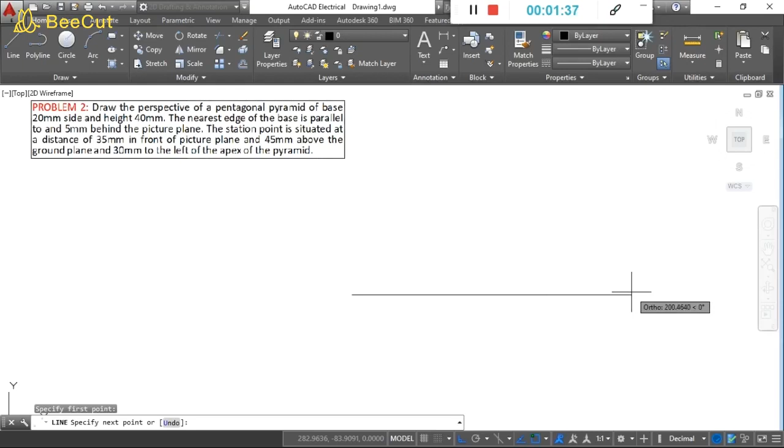You know the first step, first we have to draw a horizontal line. It is known as plan of the picture plane, PPP line. Draw the PPP line. So this line is PPP line.

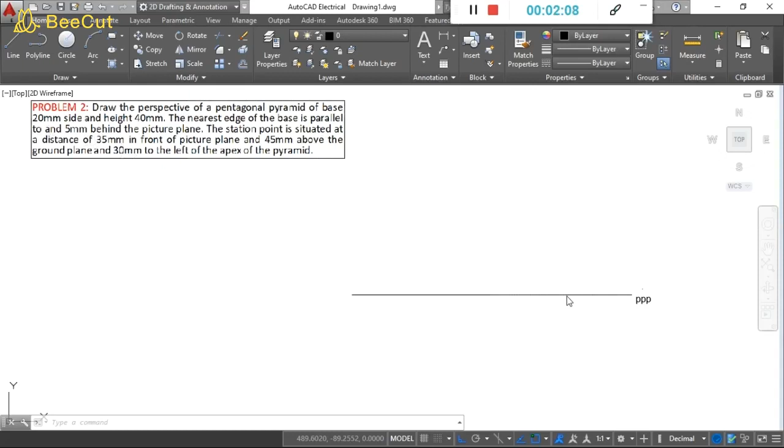Then we are drawing the plan of the object. Object is a pentagonal pyramid, so you have to draw a pentagon. All the diagonals are visible in the top view, and the 20 mm side is 5 mm away from the PPP line. So this is the top view of the pyramid. The 20 mm edge is 5 mm behind the picture plane.

Now you have to name the points. Total 6 points are there. A, B, C, D, E are the corner points on the base, and O is the apex. Now you have to draw the EGP line, that is elevation of the ground plane, on top of this one. You can take a convenient distance, for example 10 mm or 15 mm above this top view. Then draw a line. You can assume any distance.

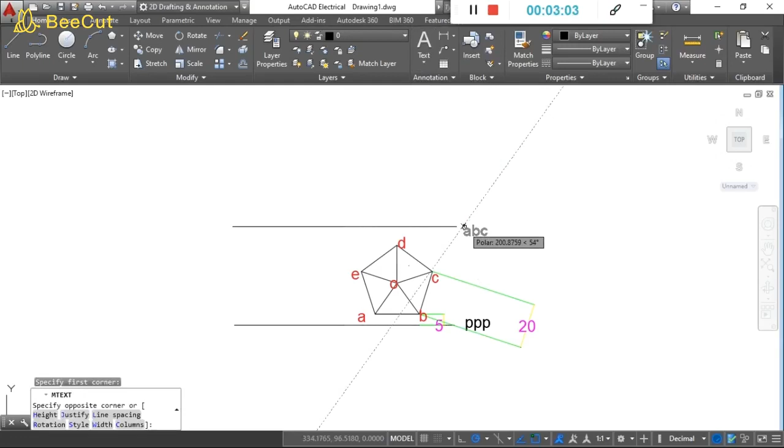So this line is EGP line, elevation of the ground plane. We are drawing this line because on this line we are drawing the front view of the object. Now you got the top view, you have to draw the front view. For that you have to draw projection lines from this one.

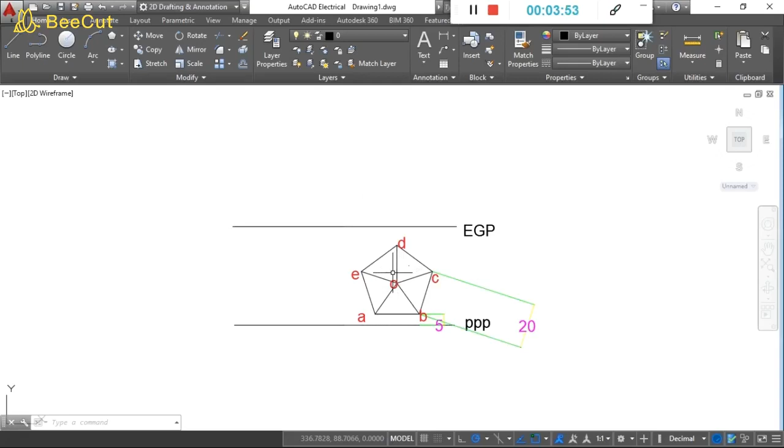See, the procedure is exactly same as that of your orthographic projection. First we are drawing a line, that is known as plan of picture plane, and then you are drawing the top view. Then you are drawing XY line. Here it is known as EGP line, and on top of that line you are drawing the front view. So all the procedures will be exactly same as that of orthographic projection. So we drew the projection lines.

Then after this you can draw the axis height. Take the axis height. What is the length of axis height? It is 40 mm. Okay, take 40 mm. So you get the axis here, and you can draw lines to the endpoints. So this is the front view of this object. So draw the front view like this.

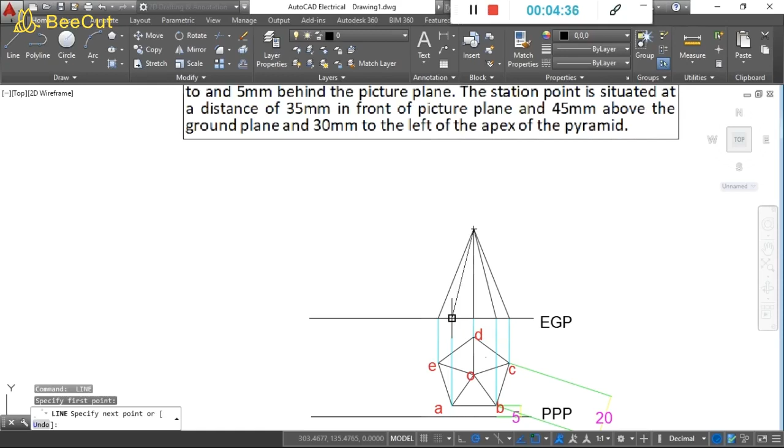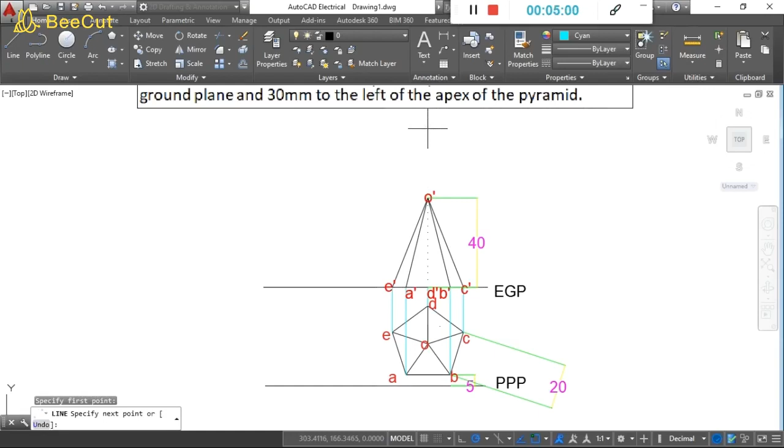So after drawing this front view, you have to mark all the points. There are total 6 points, 5 points on the base and 1 apex point. After drawing the front view and top view of the object, you have to mark the central plane. It is given that central plane is 30 mm towards the left of the axis of the apex of the pyramid. So from the apex you can take 30 mm towards the left side, and then draw the central plane like this.

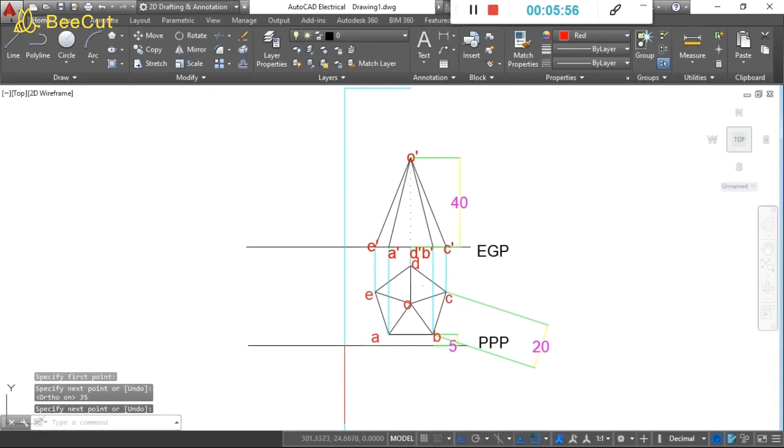So that is the central plane. You have to mark S dash and S, that is station point front view and station point top view. That is the next step. Station point is 35 mm in front of the picture plane, so you can take 35 mm below PPP line. So that is point S. That is point S.

Similarly, you can take 45 mm from EGP line, you will get S dash. This is S dash. So these are the top view and the front view of the station point. Just draw the dimension lines. It is 45 and this one is 35. Mark the distance between the apex and the central plane, that is 30.

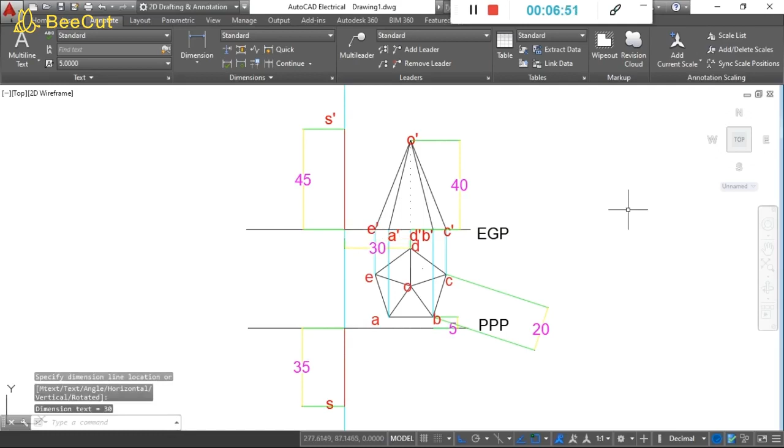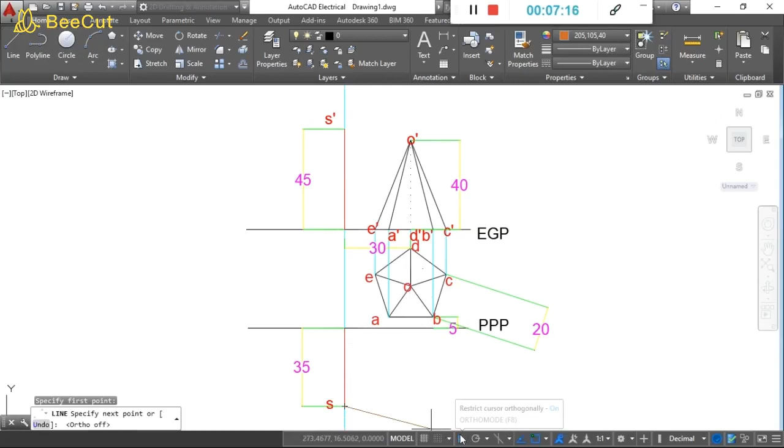Then finally S and O. So total 6 visual rays in top view, because we got 6 points in top view. In front view also you have to draw 6 visual rays, S dash and O dash, S dash and E dash, S dash and A dash, S dash and D dash, S dash and B dash, S dash and C dash.

So you are drawing all the visual rays in front view and the top view, and you can see in top view these visual rays are intersecting somewhere on the picture plane. Picture plane is the plane on which you are getting the perspective. So you will get all the points here in this picture plane, but this is the plan of picture plane. Since the plan of the picture plane is a straight line, all the points will lie on the same straight line. From here you have to draw lines to the visual rays in front view.

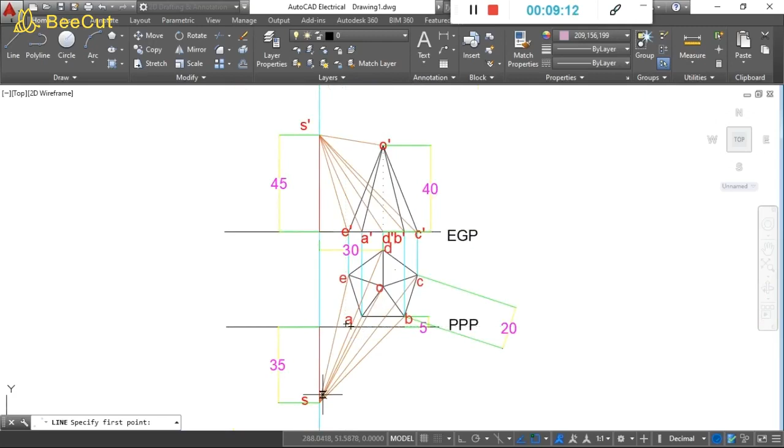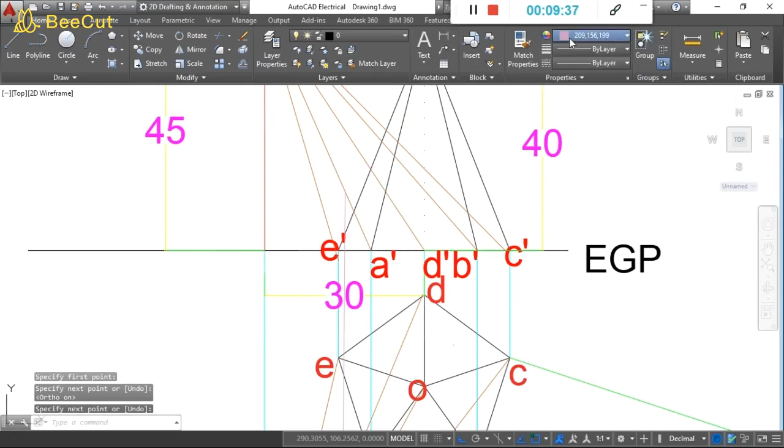Now we are drawing projection lines from the intersection of visual ray SA with the picture plane. Draw the projection line to this S dash A dash line. So that is capital A. Mark this point as capital A. Similarly, you can mark all the 6 points.

So we are drawing projection lines from B to this point, that is capital B. Similarly, projection line from intersection of SC line to picture plane, and from there you can draw the projection line like this.

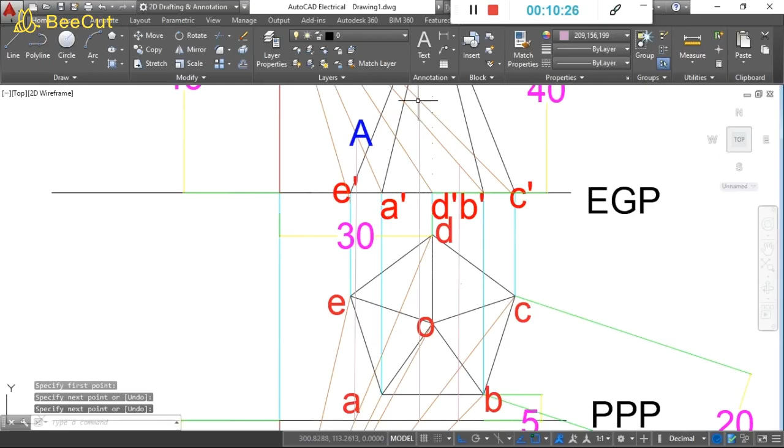After drawing all the projection lines and they intersect somewhere on the visual rays in front view, you can mark points using capital letters, because in 3D we are representing points using capital letters. You got 6 points A, B, C, D, E and O. You have to draw lines connecting these points. That is known as the perspective of this problem, pentagonal pyramid. So first we have to draw lines connecting the outer boundaries.

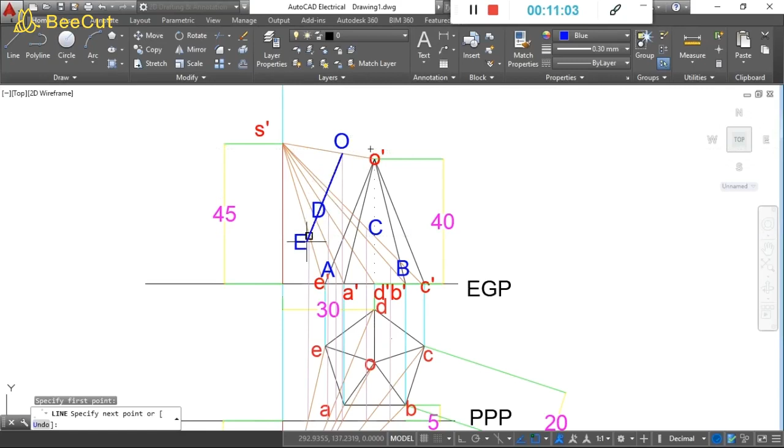When someone is looking at this object from this side, that is from the left side of the object, points C and D are not visible, they are inside the boundary, so you have to draw dotted lines connecting them. Since dotted lines are not visible here, I'm using some other line, but in your question, better use dotted lines. See, you can draw dotted lines from point D and point C. So those lines are present there, but we have to use continuous lines connecting point A and O.

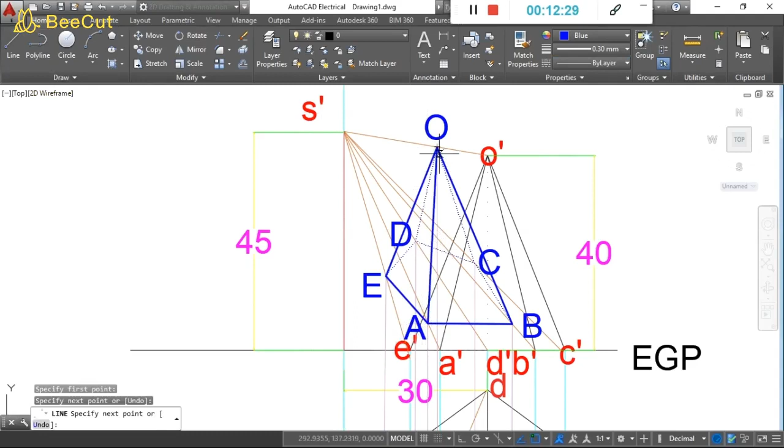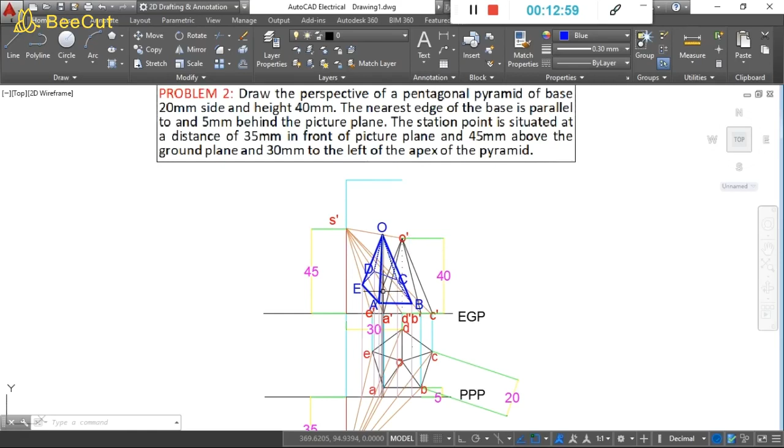So this is the final perspective of the pentagonal pyramid. All other lines are very light. This one is a little bit dark, but you don't have to increase the thickness. Just draw a darker line, that is enough. To understand the difference between perspective and orthographic projection, I am using a thicker line, but in your answer you don't have to draw a thick line like this. Just draw a continuous dark line to draw the perspective. So this is the perspective of a pentagonal pyramid. It will look like this. Okay.

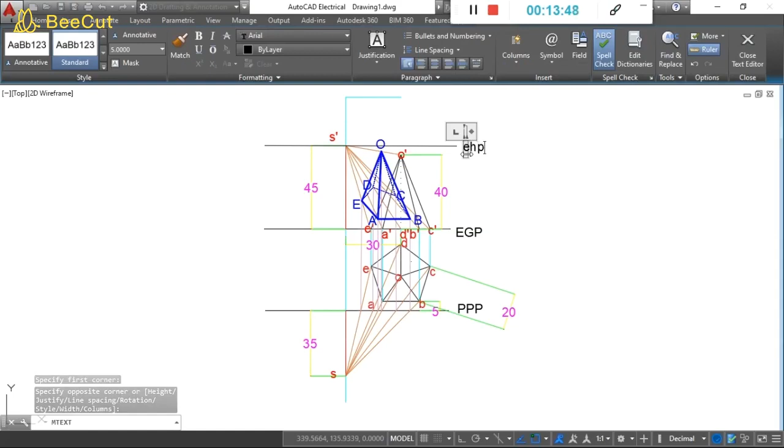Here also you can draw the EHP line, elevation of horizon plane, but that is not necessary because it is just passing through the eye level. In this question also there is no relevance for that particular line. It is a line parallel to that of EGP line. Okay, a line parallel to EGP line is EHP line. It's a plane. It's actually representing the horizon plane. So if you need, you can draw this line. So this is the final answer.